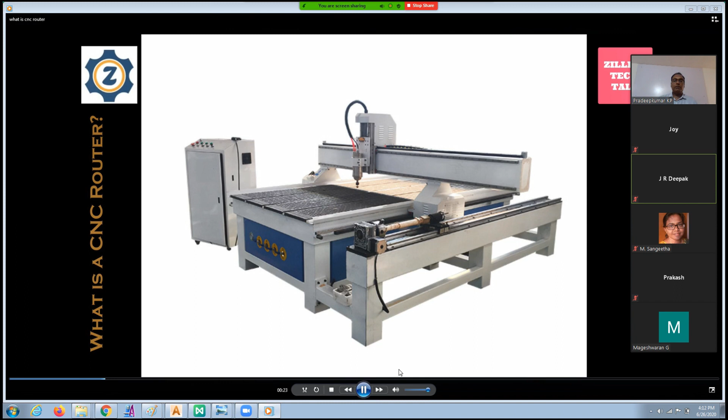So what is a CNC router? A CNC router is a machine very similar to the commonly used handheld router that is utilized for cutting various materials. But the movements and rotation of the router is controlled by CNC, which means computer numerical control.

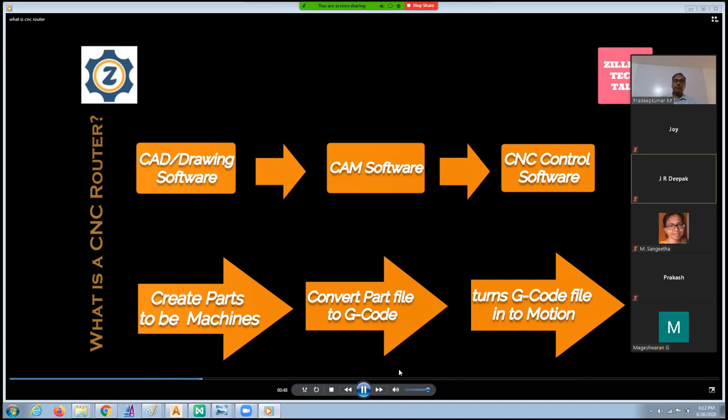CNC enables the machine to function automatically using CAD and CAM software on a computer. You can tell the CNC router exactly how to machine any material to get a precise output. It automates tool movement and rotation according to program commands or NC codes, similar to a CNC milling machine.

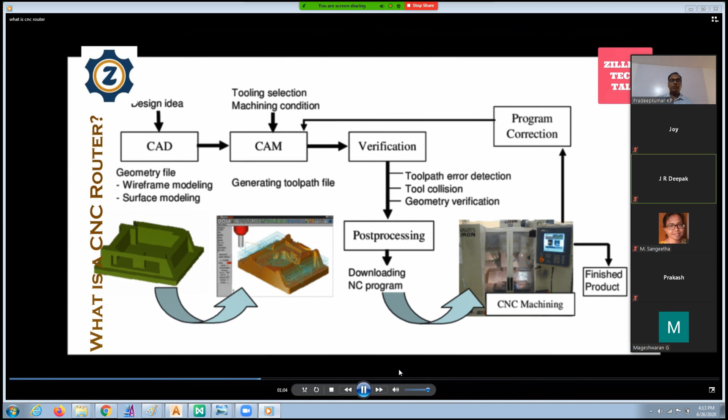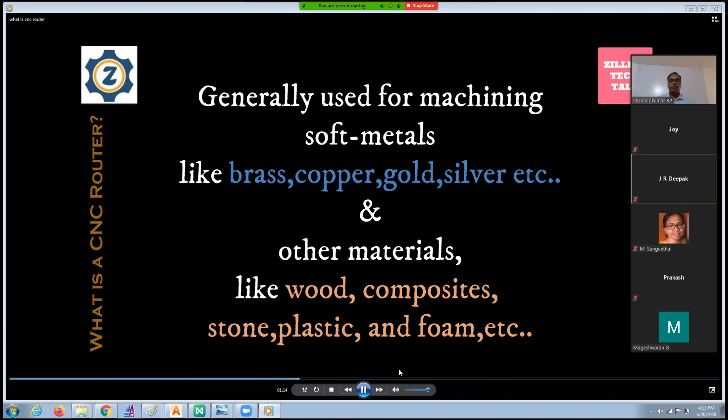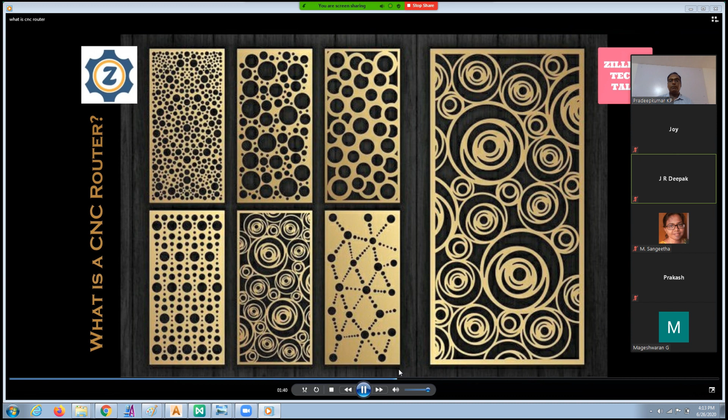Some application areas of CNC router are signage, cabinets and furniture making, aluminum and brass machining, prototyping and 3D modeling, musical instruments, jewelry making, door carving, interior and exterior decorations, wood panels, signboards, wooden frames, and moldings.

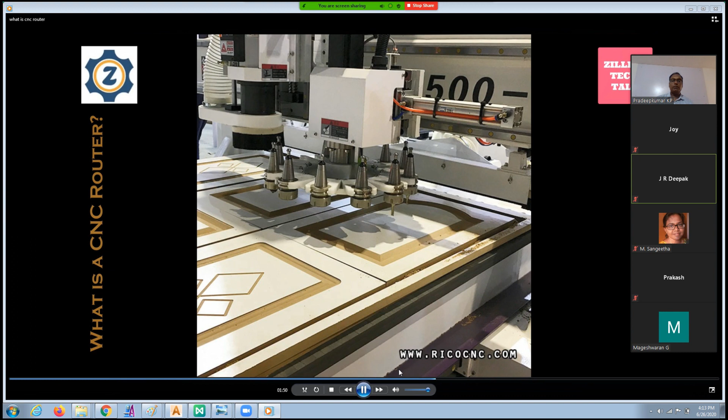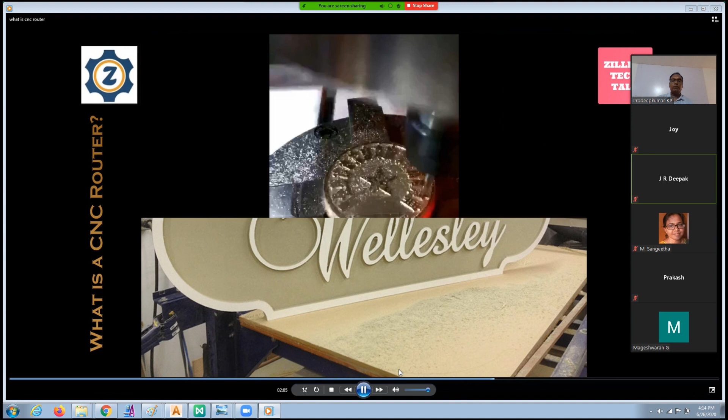In addition, it helps in the thermoforming of plastics by automating the trimming process. CNC routers reduce waste and increase productivity, producing various items in a much shorter time than conventional machines. CNC routers are utilized in hobbies like woodworking, creating prototypes in engineering, producing pieces of art, and certain forms of production work.

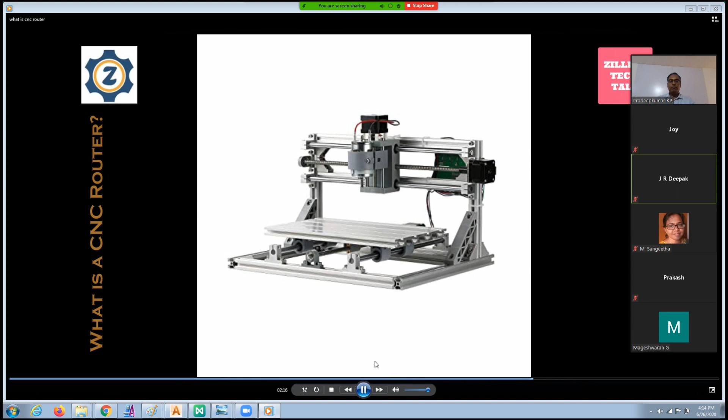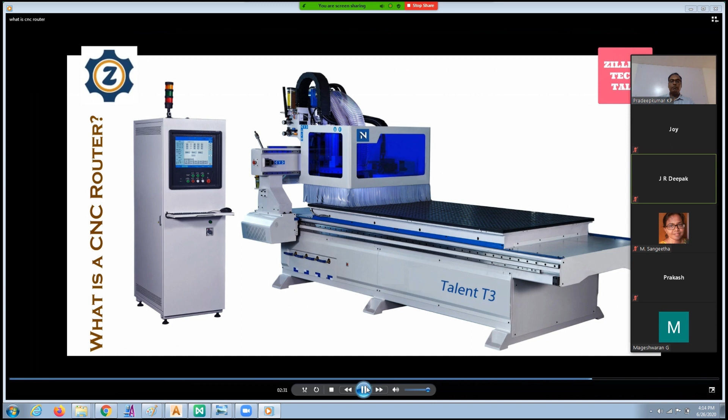Many hobby and do-it-yourself CNC machines are in the CNC router category. CNC router is comparatively easy to use compared to other CNC machines, so it is used by traditional workers in furniture making, wood carving, jewelry making, etc. with ease. Industrial models of CNC routers are extremely large and can take up a good amount of space.

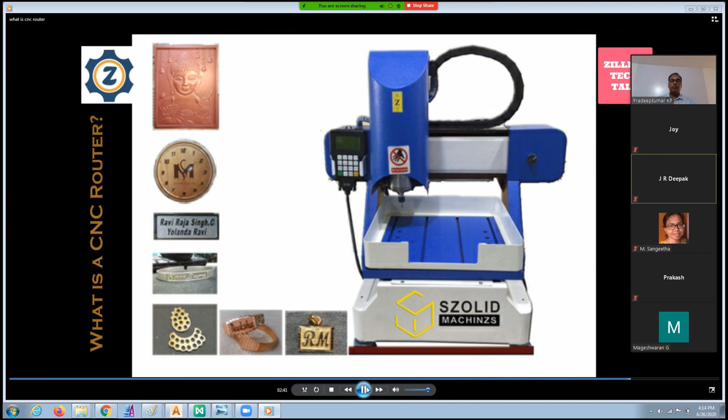However, newer desktop CNC routers are much smaller and can be placed right on a table. More advanced CNC routers with great capabilities to be incredibly precise in their production process have also been developed.

So this is the basic of CNC router machine. We will see some more videos of CNC machine working in some applications. First I am going to show that in gold cutting applications. You can just see that.

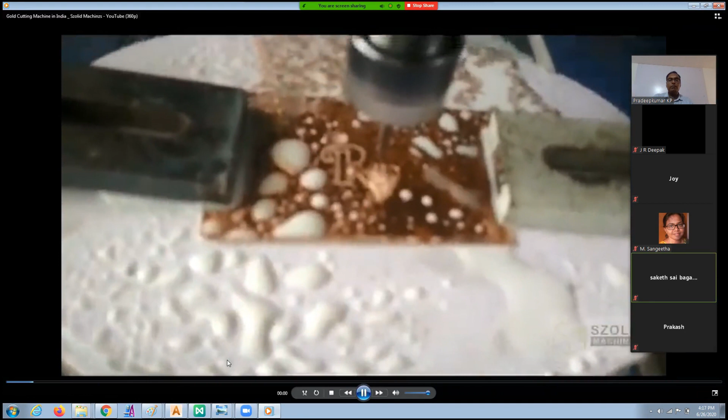This is a gold sheet cutting for making patterns. This is the output.

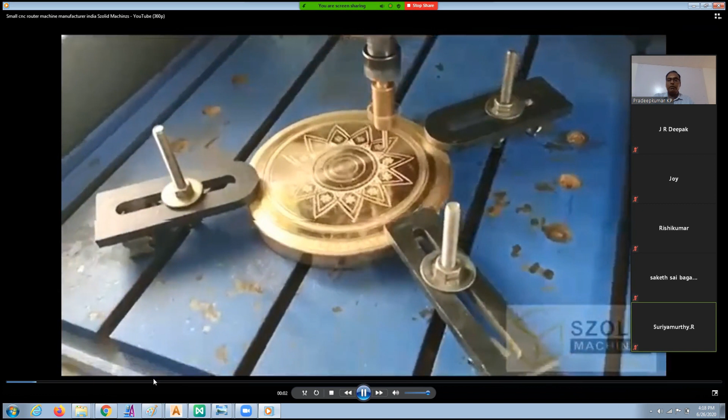I guess many kinds of applications are available. This is for marking, just marking.

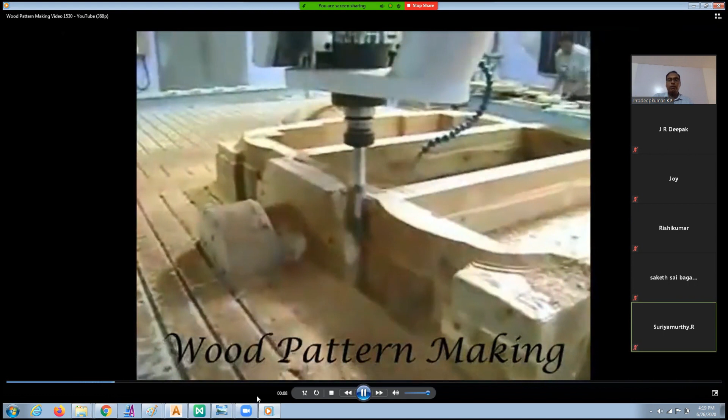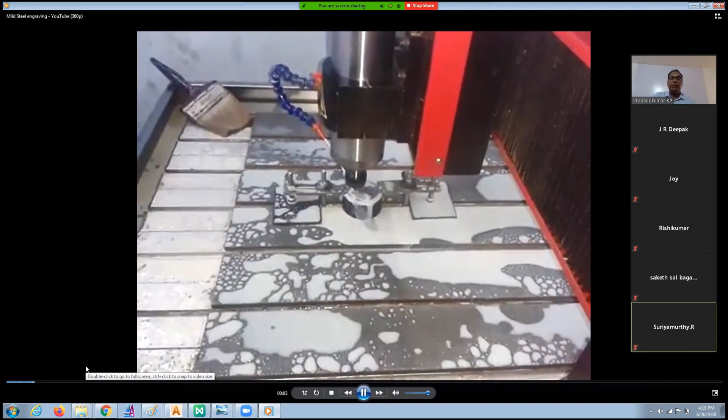This is for wood pattern making. The pattern is used in foundry for casting. It also can be used for die making, small dies.

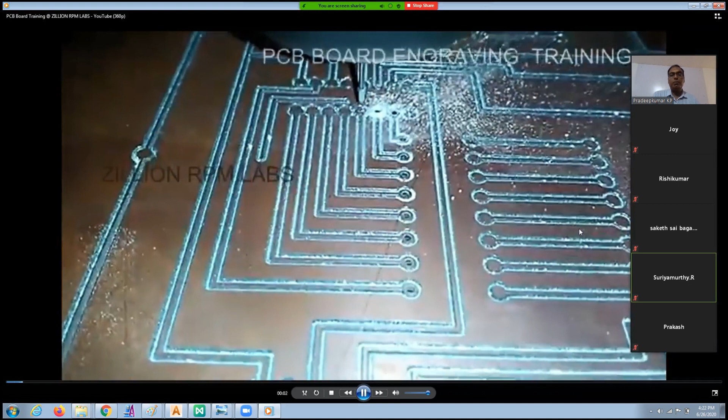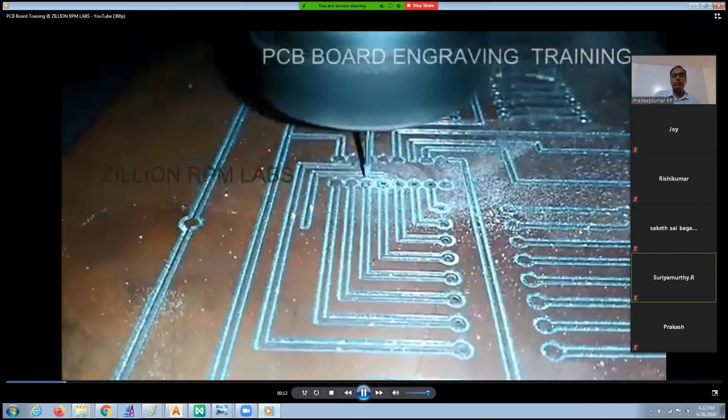This is for PCB board engraving and drilling. It's not coming.

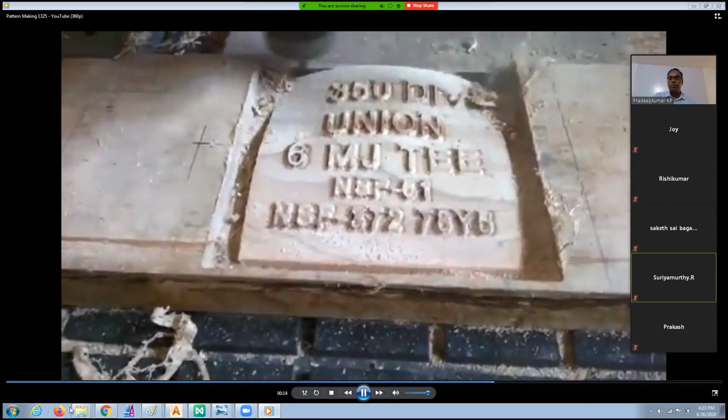So like this, many application areas are there where we can use CNC router machine, and we will see the kind of material we can use with CNC router are numerous. The concept here is what I have already explained to you.

This CNC milling machine is generally C column type. In structure, if you see, it will be a C column type machine. In CNC router, mostly it's a gantry type machine, like a bridge type or gantry type as we call it. Those kinds of machines are used in CNC router machine, and the precision of CNC router machine is not as good as VMC or other CNC machines.

It will be like 20 micron to 10 micron precision. So it depends upon the workmanship with which that machine has been made and the technology on which it is made.

So generally CNC router is just meant to move the axis in X, Y, Z, as well as if you want to give the fourth and fifth axis also we can give. Like that we call it a rotary axis or the fourth axis or fifth axis. Generally fifth axis we use for making statues and all those kinds of things.

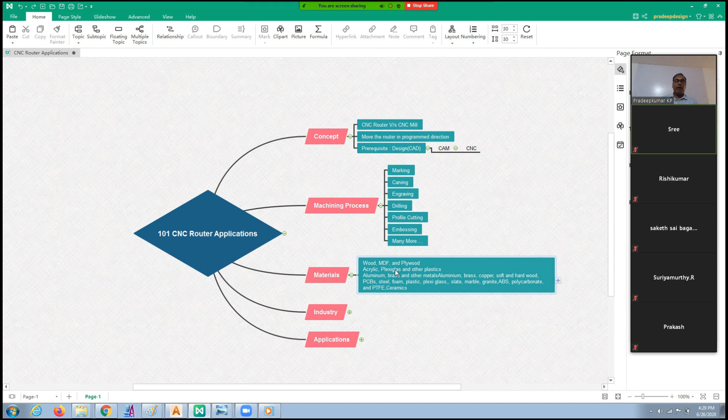We have tried many materials like wood, ceramics, glass, brass, and all soft metals. And in hard metal also we have SS and MS, also we can work with the CNC router machine. Only thing is that the accuracy and the precision, that we have to compromise a little bit. But many applications we find that kind of accuracy and precision may not be required. In those places we can use this machine very well.

Then as far as industry is concerned, you take any industry - jewelry making, furniture making, construction itself, you can do different kinds of material. So we can name any areas of construction industry where you have to create a shape by cutting the material or removing the material, there we can use the CNC router machine. And in electronic industries like PCB and all those kinds of things, and marking.

Tag marking, etc., we can use in the electronic industry. And in the signage industry also, a lot of signboards you can see in front of shops, which can be done in a very elegant manner with the CNC router machine with different kinds of designs.

So the CNC router machine generally improves your creativity, because you have a lot of tools with the software where you can design in a beautiful way, and also it increases your productivity. Because generally if you do with hand, suppose if you want to cut an MDF sheet in a circular round shape, with hand it is very difficult. If you give it to the CNC router machine, you have to give the values in the designing - how much diameter you want to cut, and with what tool you want to cut.

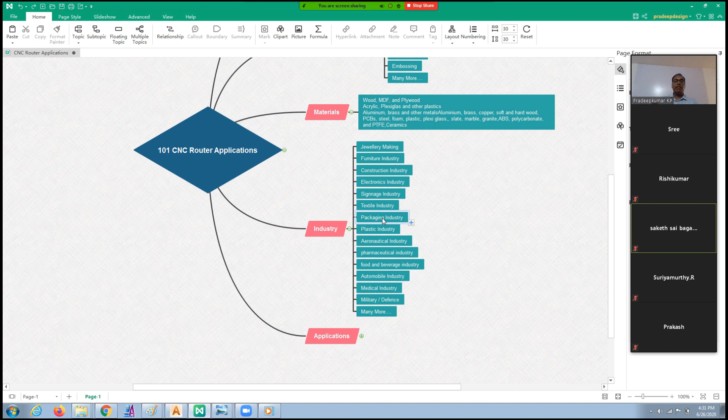Then in the textile industry also, many application areas are there, where they use badges and make the die with the CNC router machine. In packaging industry also, the die for the packaging, embossing, and dies they use for marking the name on the packaging, also for cutting - they use it.

And in plastic industry you can make the pattern for the plastic product. Any plastic product you can make the model and pattern, and also the die for that plastic product, and also direct components you can make out of the plastic if you want to do that. In aeronautical industry, you can take each and every area where we can - even in interior, or in any high technology side also - we will find some point where we can use this machine, because the main principle is that it moves in the direction it wants with a tool.

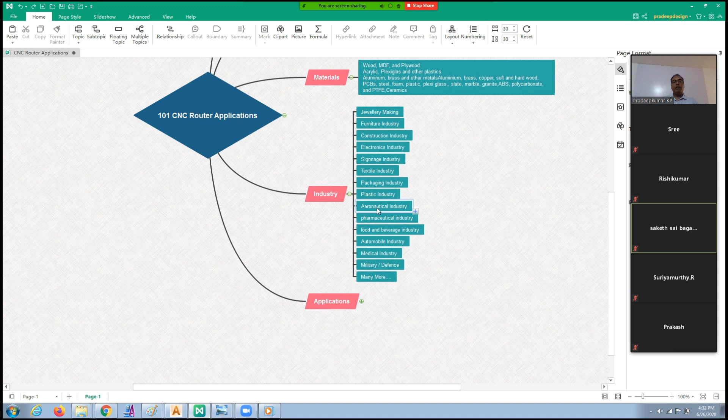So that you can apply wherever area you find it useful, you can use it. In pharmaceutical industry, if you want to make different tablets, different shapes of tablets, the die for that, you can do it. In food and beverage, we use it for directly giving shapes to food articles with dies. In automobile industries, you use some direct components machined with CNC router, and in interiors also it's used. In medical industry also we use it for different applications, and military and defense, and also many other areas we can use the CNC router machine.

So I have given the name for this webinar as 101 applications of the CNC router machine, just to give inquisitiveness - so much use is there for this particular machine. You will come to know there are many more applications for the CNC router machine than what I have specified as 101. Because if you go on searching and try to categorize it, you will find out there are many more application areas where we can use this particular machine.

So we will just see a glimpse of the 101 applications, one by one, that I have noted. I will read it now. The first application I have given is graphite electrode for EDM.

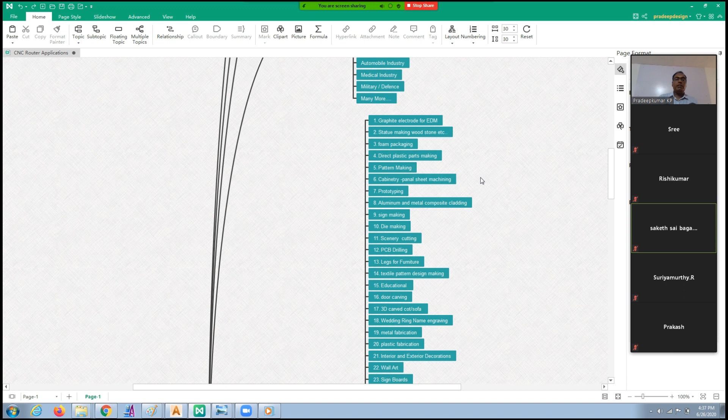Then another application is cabinet panel sheet machining - cabinet making, like wardrobes, kitchen cabinets and many other areas. Earlier, a carpenter would come and measure everything, cut one piece, go and place it, check if it matched, and if not, take it back and correct it, then fit it again and check, like that. But now with the CNC router machine's help, in the design stage itself they can design the full cabinet in software. Software is there, you can design it and show the customer - okay, this is the way I am going to make this almirah, this cabinet, kitchen cabinet, wardrobe, or whatever.

In the design software itself, you can give different kinds of fittings, and wherever drilling or cutting is required, everything will be automatically calculated, and nesting can be done in the software itself. It will automatically calculate how many 8x4 sheets of raw material, particle board or MDF, are required for making the cabinetry. The program for each sheet and the NC code will be created, and that NC code can be given to the CNC router machine to make those parts in one fit itself. This saves a lot of time and lets us make it to our taste - that is the main advantage.

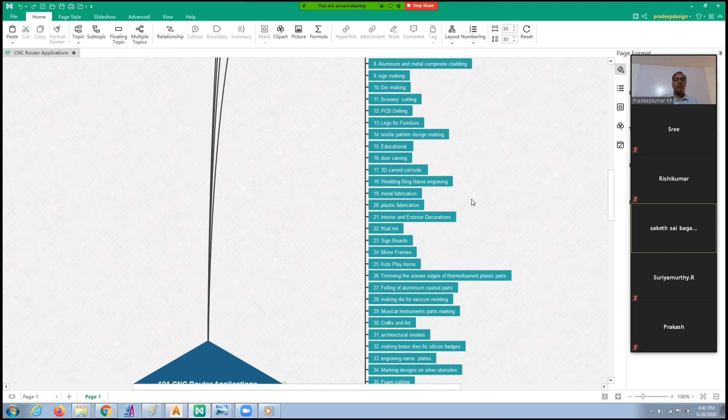Then in die making, you can do scenery cutting or letter cutting. Then PCB drilling, legs for furniture - I'll just read these out one by one: textile pattern design making, educational uses, door carving application, 3D carved sofas and cots, wedding ring name engraving, metal fabrication, plastic fabrication, interior and exterior decorations, wall arts, designs, sign boards, mirror frames, and kids' play items.

Then trimming of uneven edges from thermoformed plastics - once we do thermoforming, some extra material is left out, so it can be trimmed using this machine. In the same way, cast parts also have extra material that can be filed out like that.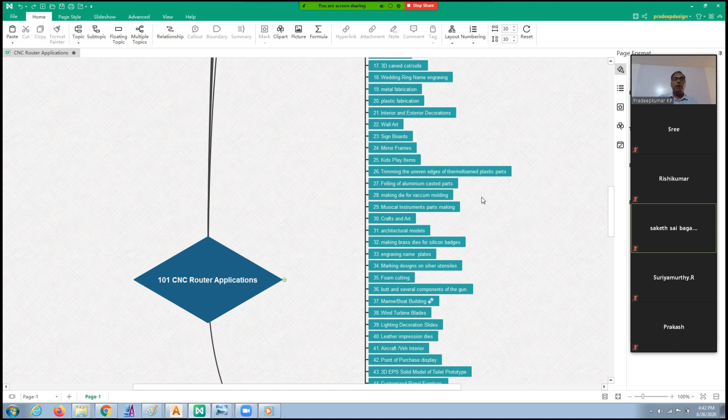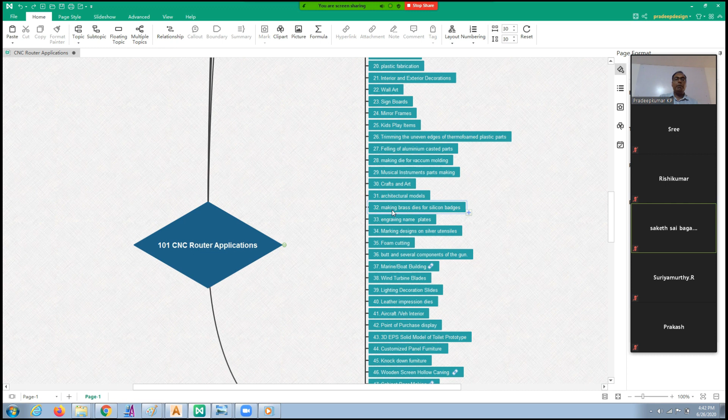Then making die for vacuum mold - if you want to make vacuum molding of plastic material, you need a die for that, which can be made in wood or aluminum using the CNC router machine. You can also do musical instrument parts, arts and crafts applications, architectural small models, and making brass dies for silicon badges, like silicon badges used in bags and many items.

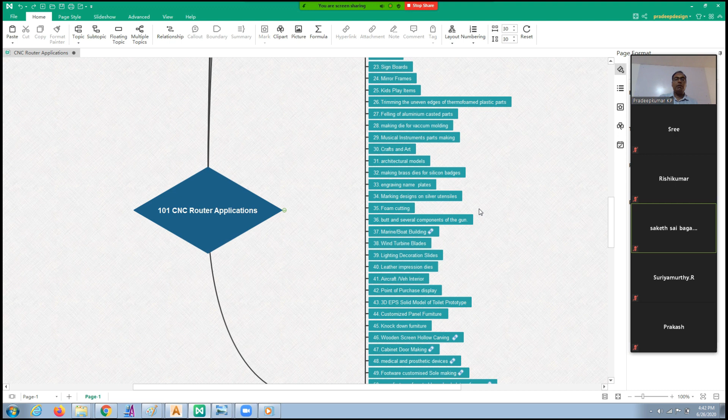Engraving nameplates and marking designs on silver utensils - you can mark silver utensils with different designs and names using the CNC router machine. Then foam cutting of several components in butts and firearms equipment, and in marine and boat building you can use it for boat building also.

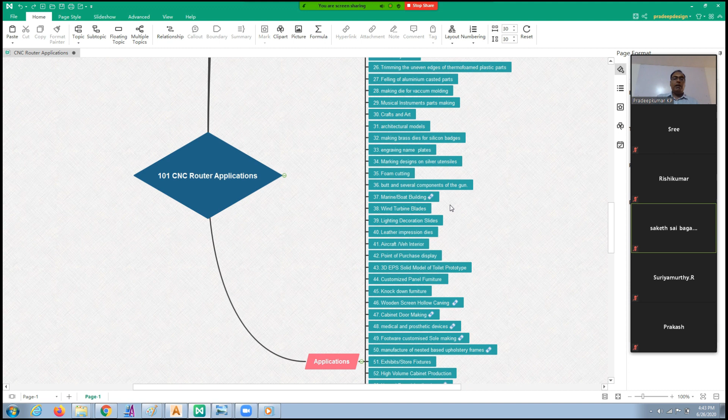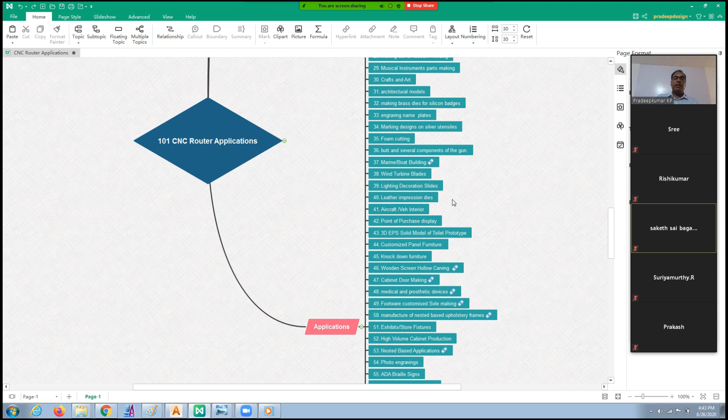And for wind turbine blades, we can do that, and lighting decoration slides - you can use this CNC router machine to manufacture creative slides. Leather impression dies also you can do, and aircraft and vehicle interiors also can use this machine for that kind of application.

Then for point of purchase display, and 3D EPS solid models for sanitary ware - you can make EPS foam models for different sanitary ware, and customized panel furniture. Knockdown furniture also you can make - that's furniture which can be assembled and taken apart easily, without permanent fasteners on each part.

So wooden screen hollow carving - like this wooden carving also you can see that.

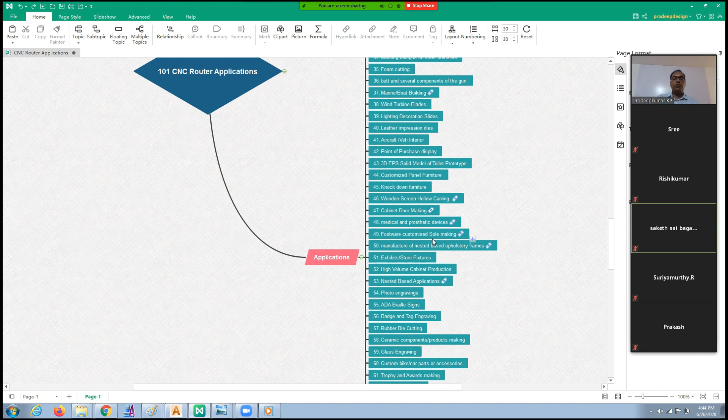Cabinet door making, and medical and prosthetic devices also you can use. The footwear customized sole making - some people want different kinds of heights in the sole, so accordingly the sole can be machined using the CNC router machine. Manufacturing of nested upholstery frames - we have to make a frame for making upholstery, sofa and all those things. For that, the frame can be made using the CNC router machine.

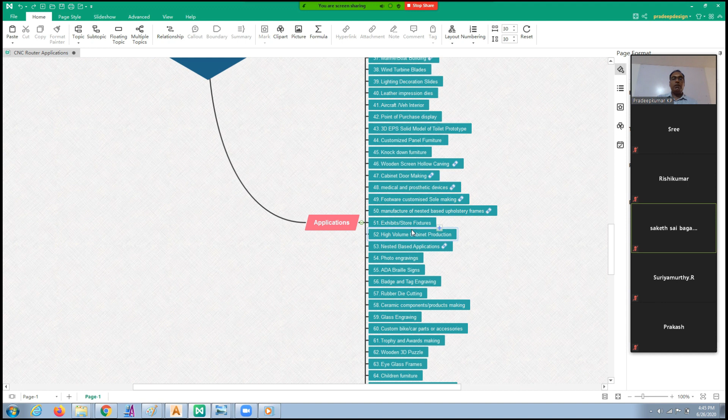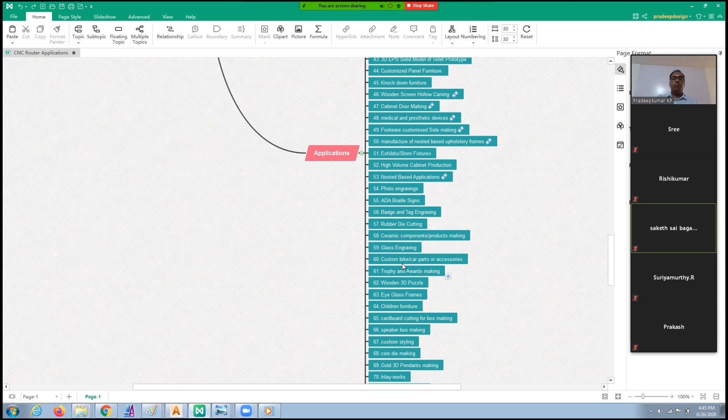Then exhibits for stores and fixtures, high volume cabinet productions we can use. Then nested based applications, photo engraving and braille signs, badges and tag engraving, rubber die cutting, and ceramics component or product making, glass engraving, custom bike and car parts accessories.

If some people modify car and bike parts, they can make the parts using CNC router machine. Also trophy and award making, and wooden 3D puzzles we can make with the CNC router machine. Eyeglass frames - in spectacle eyeglass frames we can use wooden frames, and nowadays there is a trend to use wooden frame instead of glass frame. That also we can do with the CNC router machine.

Children furnitures, cardboard cutting for box making we can use. Then speaker box making, cushion styling, coin die making, gold 3D pendants making, inlay works, making sports items like cricket bat and all - you can make using the CNC router machine.

Wave board, then kitchen table and countertops, handcraft duplication - handicraft items we can duplicate easily with the CNC router machine. Bathroom fittings we can use in different areas. Miniature models - if you want to make a small model, a miniature model of a bike, we can use CNC router to make that. Then tiles decoration, and tools and knife handles for tools and knives and all.

Jewelry box making, and watch cases and accessories machining. Then customized apparel accessories, buttons - you can make customized buttons and all those kinds of add-ons to your apparel. Wall clock designs, different kinds of wall clocks with design you can make. Demo models for teaching you can make.

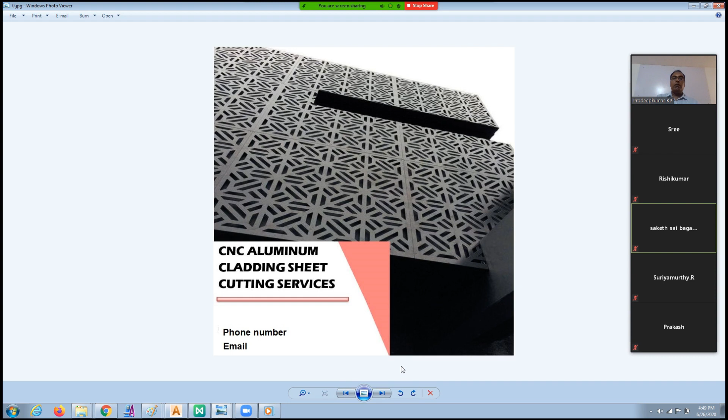I will show some of the images now. This is some of the images - can you see the images?

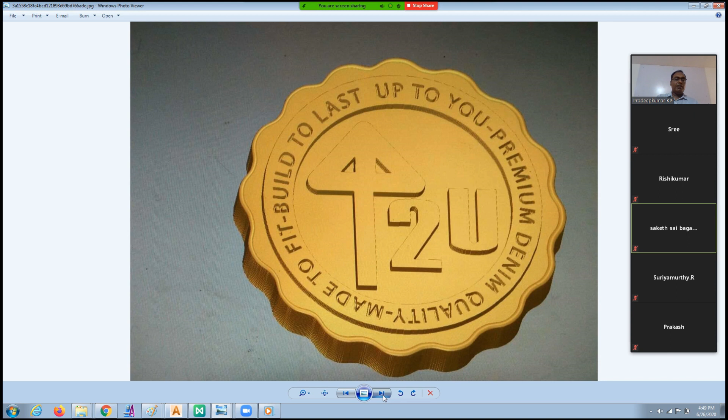Hello, is anybody there? Can you see the images? Yes sir, yes sir.

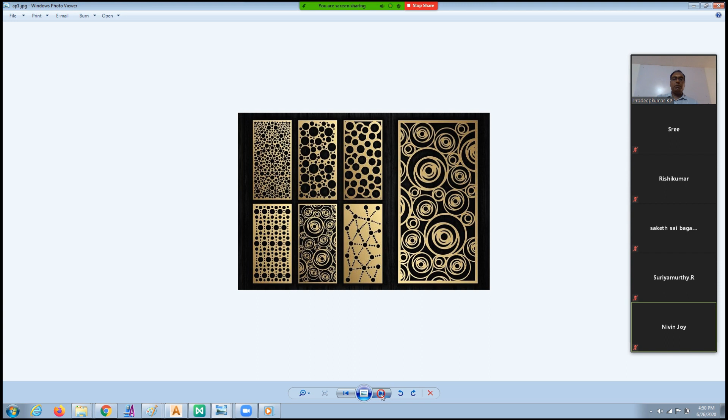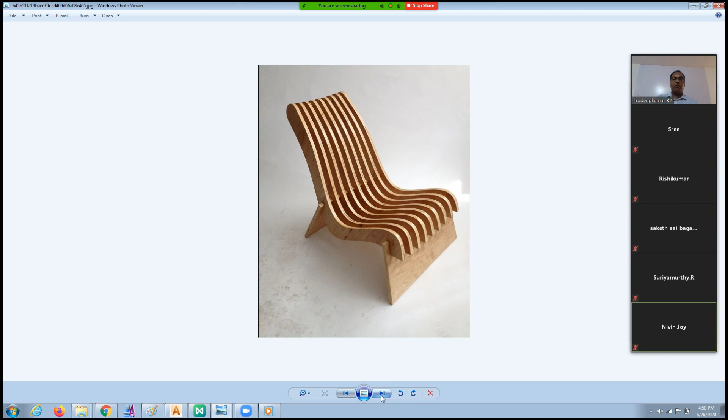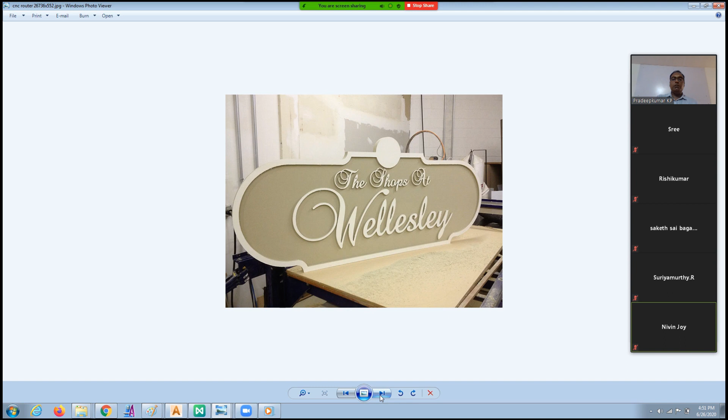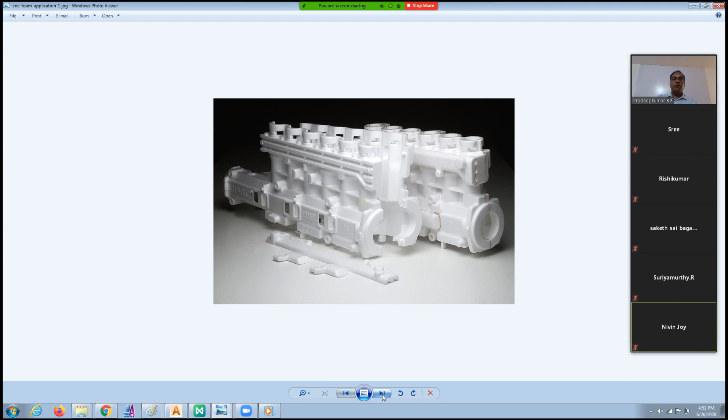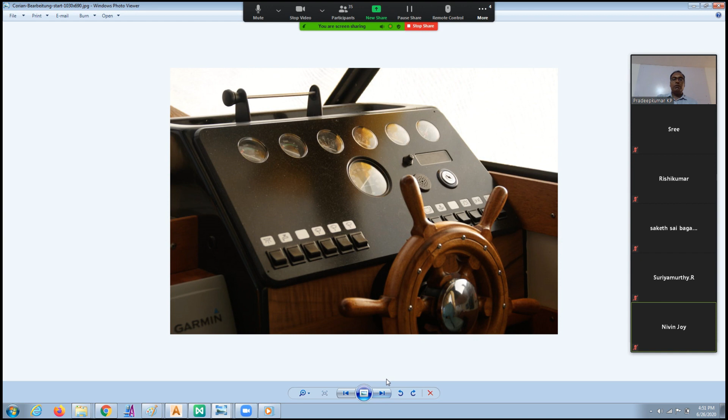This is for boat manufacturing, so you can mill and machine it directly with the CNC. Big CNC router machines are available. This is for cabinetry, doors, signage making, and engraving on a silver plate. These are all the models, the prototypes we can make, using it as a pattern or a prototype, directly machining from the CNC router machine.

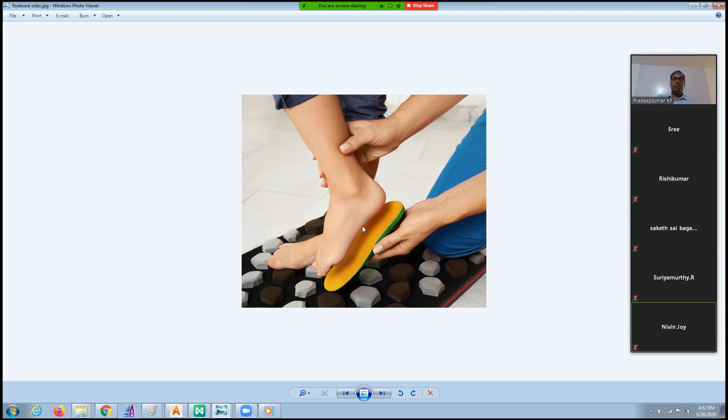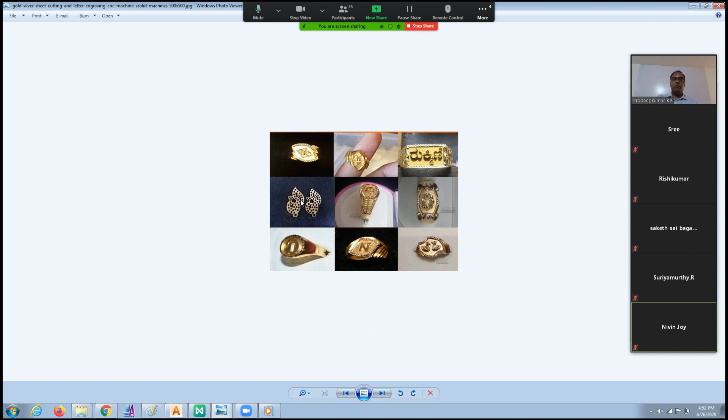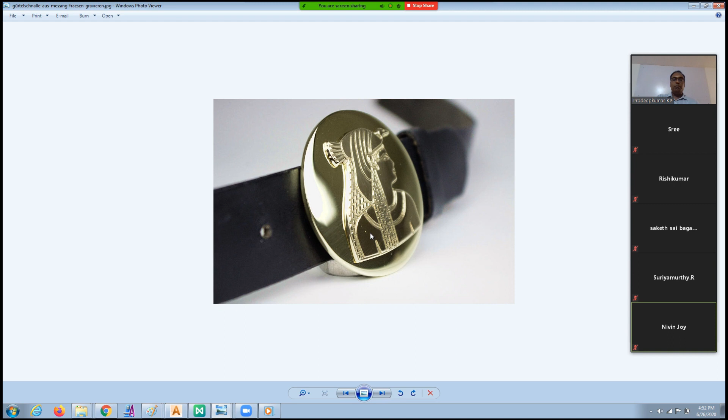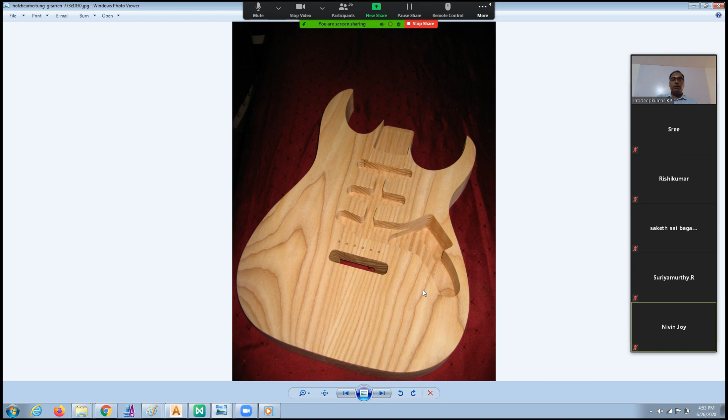You can have photo engraving also with a CNC router machine on stone or any other materials. In stone also you can write the name, and brass engraving or coin die making, and for different other materials we can do the die for it, and for musical instruments like that. So these are all applications of the CNC router machine.

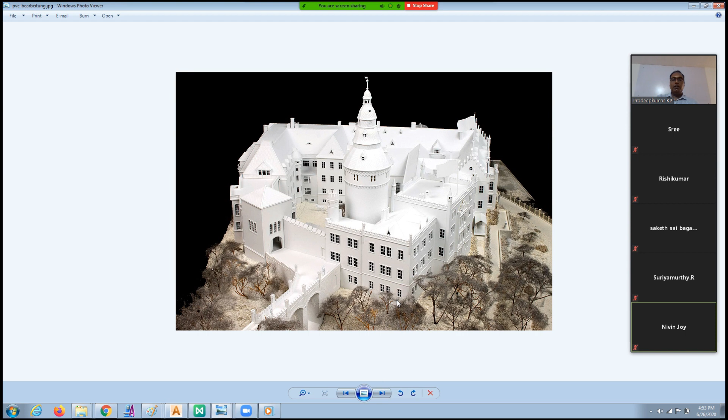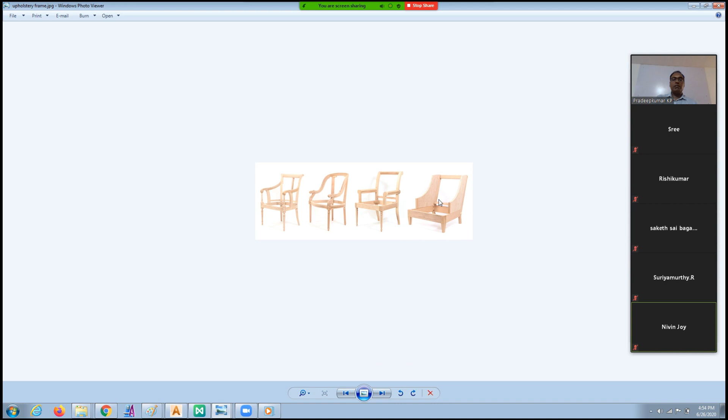Thank you. I hope that you got some idea about what is a CNC router machine, where it can be used, and if you have any questions, I think you can ask now.

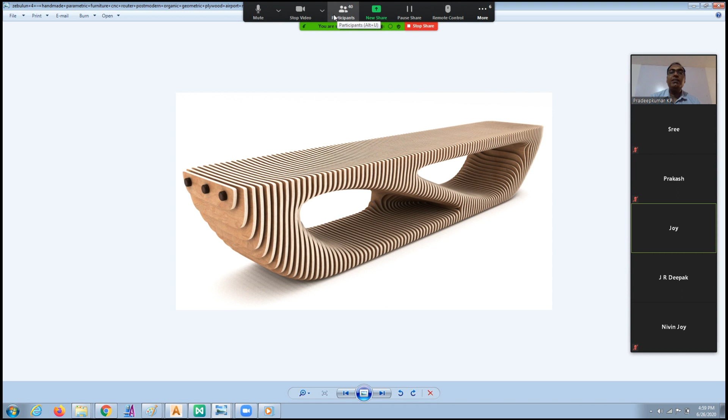Is G-code... remove the space... is G code and M codes enough to get a job in a CNC machine production company? I think a student has asked whether it is enough to learn all G codes and M codes to get a job in CNC machining.

Nowadays, earlier we were having NC machines. In NC machines, we would write the program manually, enter all the NC codes in the panel, how much distance in X, how much in Y, and the machine would run accordingly.

Nowadays every machine is CAM integrated. That is CNC - what purely makes it CNC is that a computer is controlling it. So whatever G codes are required are automatically generated. The only benefit of knowing G code is that once we look at it, we can understand what it means, because we are not going to correct it or write the NC code manually every time as we did earlier.

Nowadays, even a simple program to cut a rectangle - we draw a vector rectangle, select what tool to use, and do all this in CAM itself. So nowadays knowing the software is more important than knowing the G code. But knowing G code will definitely help if there is some variation or improper integration in the control system, then we have to change some code for G code - that time it will be useful.